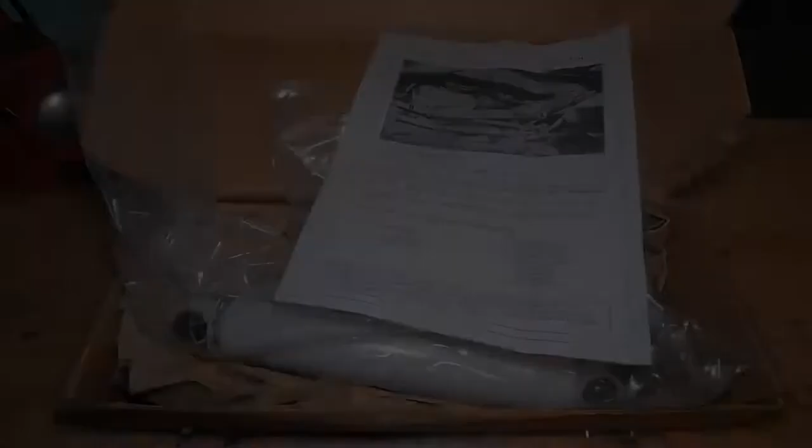So stick around. As for what comes in the box, this is what you're going to get. Obviously your wonderful picture of how this is supposed to look, your instructions, and the drop down bracket.

This is going to go on the opposite side of the steering box. You'll see that in just a sec. And then we have the hardware to mount that, and of course the steering stabilizer or damper itself.

This is the Rough Country kit, and again, this will be available in the link below.

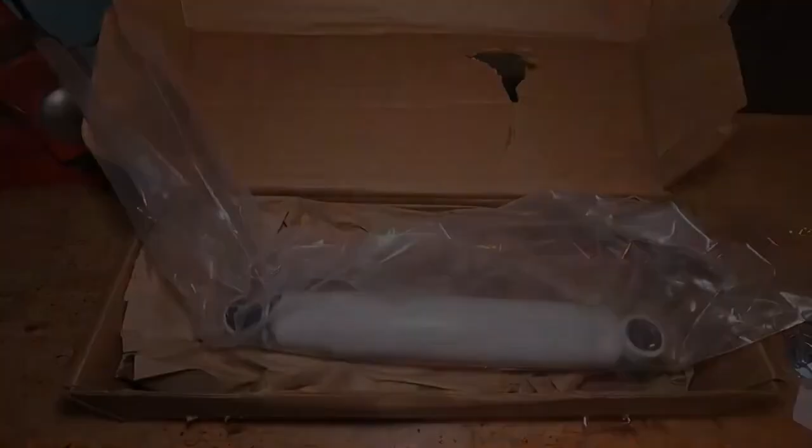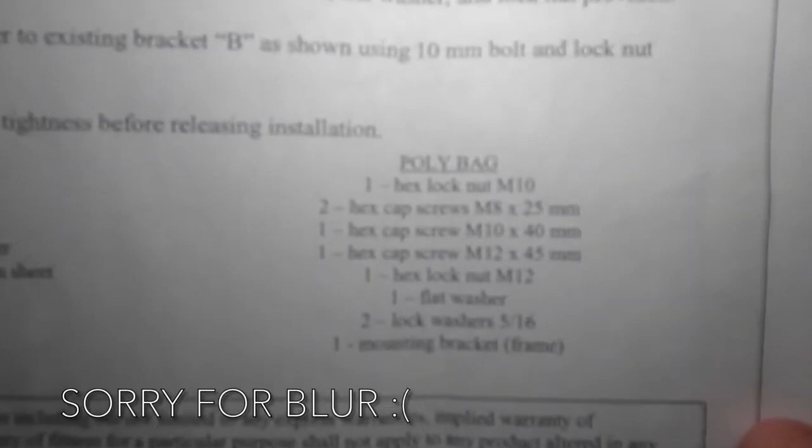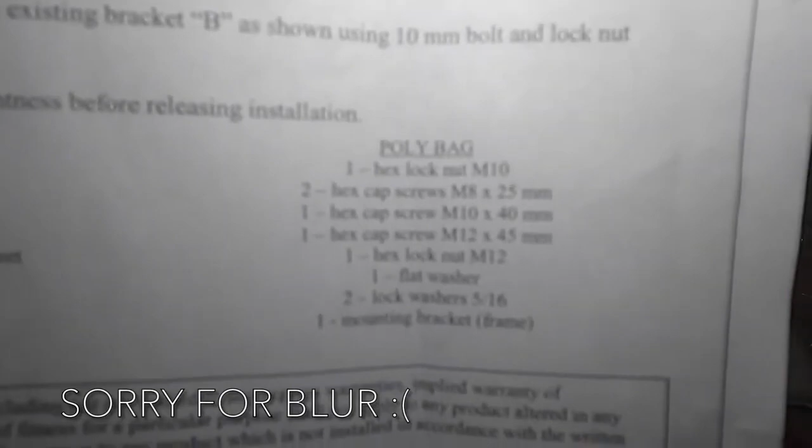For anybody who needs to replace their hardware, if you have this kit or if you are trying to replace hardware for a stock kit, this is the hardware that you will need. These are the screws for the mounting bracket to get the actual stabilizer onto the crossover arm and to get the bracket onto the frame itself. So this is the hardware that you will need, and I will show you how all of this is installed.

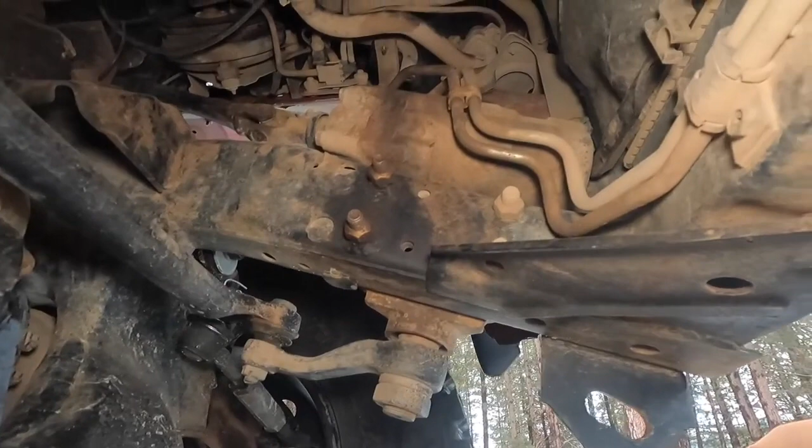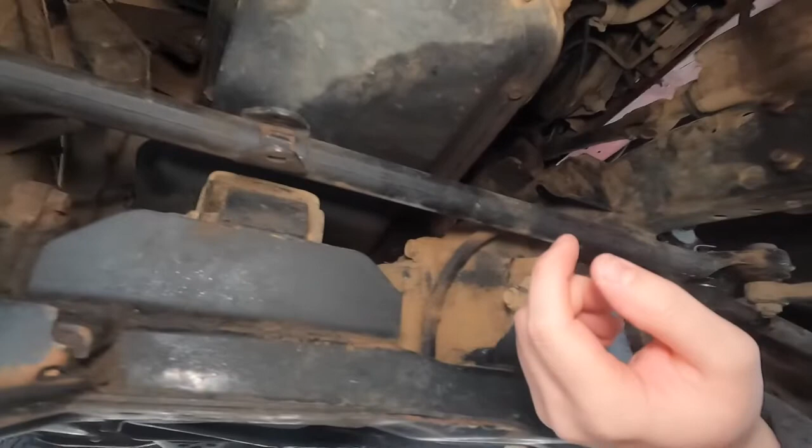Forgive the shakiness here, I am on the ground. This is a bit of a weird angle for me, but what you're looking at here is the back of the steering box. You can see the pitman arm, and these two holes right here in the frame are where the drop down for the steering stabilizer will mount, and then it's going to connect right over here into the factory crossover bar. So that is where I'm going to be mounting it, and I will just do a quick little time lapse to show what that's going to look like.

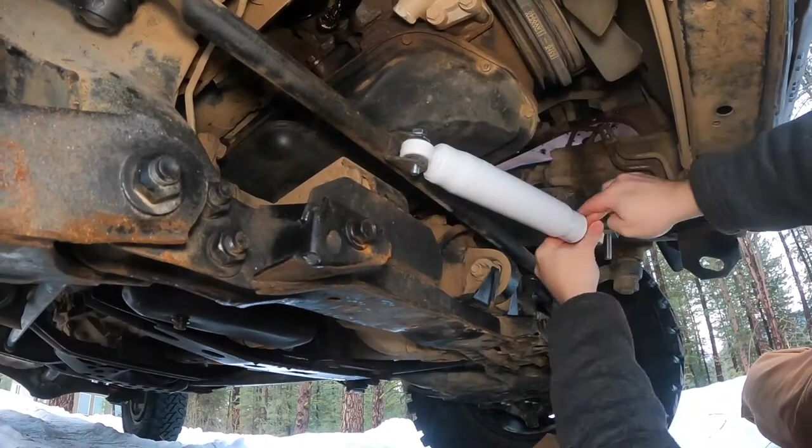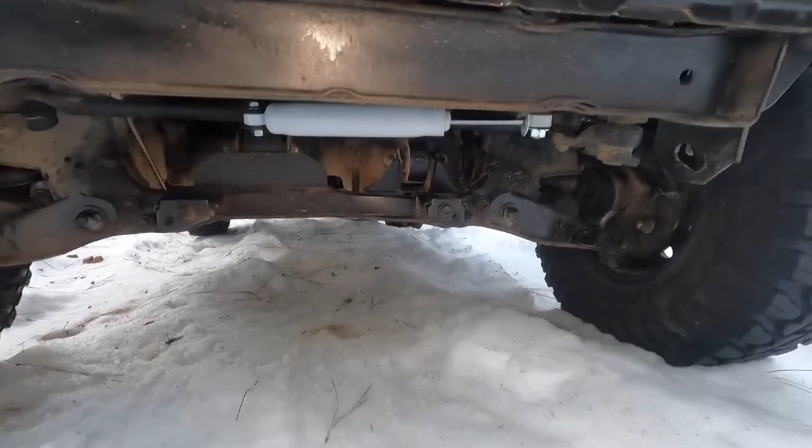Well, there you have it. There's the quick and dirty speed run of the Nissan D21 or Pathfinder steering stabilizer from Rough Country. And again, I have thrown all of the other part numbers down in the description below.

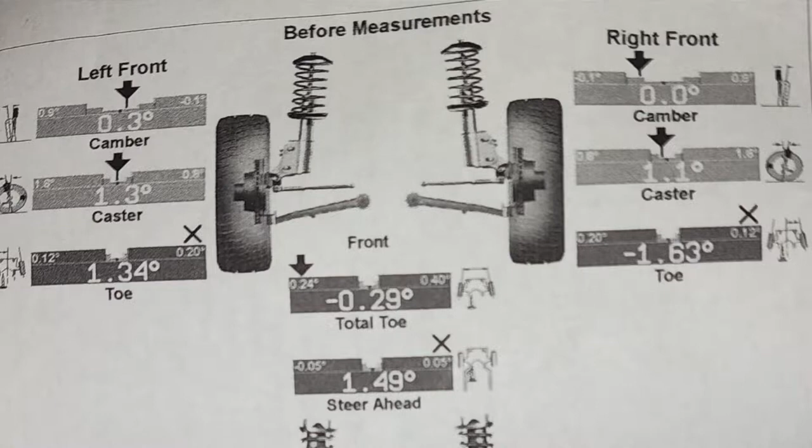It's a little bit hard to show, and I'm sure you're hearing some road noise, but that steering stabilizer makes a huge difference. By the way, I'll throw up the numbers of the alignment. I teased at that earlier, but that alignment, even with me eyeballing it, was only a degree off in camber and a degree off in toe in, so I'm pretty stoked about that.

So as far as the steering stabilizer goes, I noticed it feels a little bit heavier when I'm turning. It feels a little bit heavier when I am coming into a rut, but I also noticed that if I take my hand off the wheel, it doesn't feel like it's pulling to either direction. It just stays consistent, it stays smooth, and that's exactly what I was hoping for.